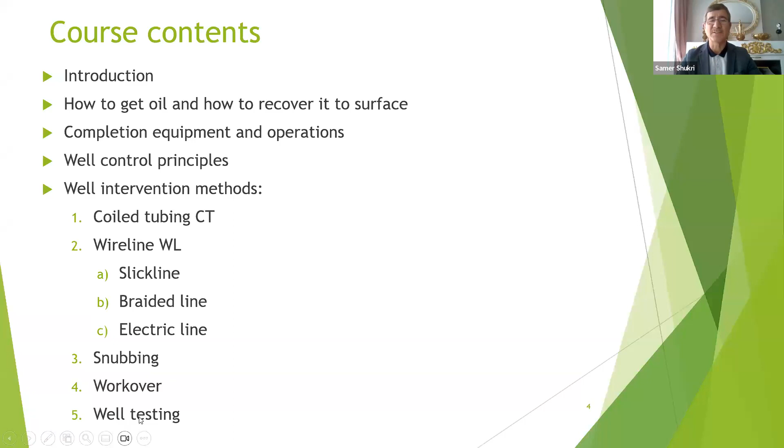Then well testing. Well testing is very, very important, so I will give you golden rules and golden principles for this subject. You will be very happy because I like and love well testing too much.

So I will spend maybe 2, 3, 4 days as you like and give you all the secrets of well testing. For coil tubing, we will go through these items: what is coil tubing, the birth of coil tubing technology, advantages of coil tubing, because sometimes you cannot use wireline if the well is deviated, highly deviated, or horizontal.

So you have to use coil tubing if you want to pump fluids. Barrier theory of coil tubing: we have primary, secondary, tertiary barriers. Calculations, we have too many calculations. Pressure testing, how to do it. Emergency procedures, about 10 procedures we have. BHA components, bottom hole assembly.

We have maintenance, coil tubing manufacturing and material, coil tubing onshore and coil tubing offshore - there is a difference between them. The space is very limited offshore, so we don't have truck mounted or trailer mounted there. Onshore we have trailer mounted.

But offshore we have truck mounted, lifted onto the rig or platform. You see, trailer onshore, truck offshore, by lifting. They give you a space of 2 by 2 meters, you cannot take more, or maybe 5 by 2 for example. So you have to know where to put your equipment. It is not open like the desert where you can put it wherever you want - that is not allowed.

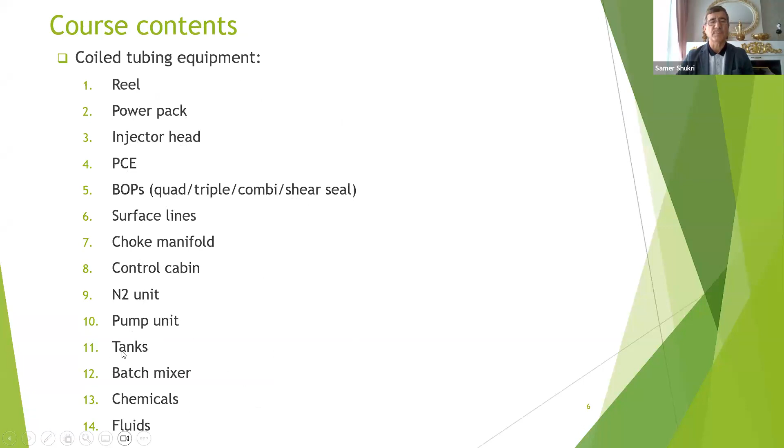The equipment of the coil tubing includes the reel, power pack, injector head, pressure control equipment, and BOPs. We have four types: surface lines, choke manifold, control cabin, nitrogen unit, pump unit, tanks, batch mixer, chemicals, fluids. Now, what are the applications of the coil tubing?

We have unlimited applications of coil tubing. It is the best invention in the oil industry, the best invention ever. Why? Because we save time and cost compared to working with a workover or drilling rig. If you want, you can do this job or operation within one day, and it can cost you 10% or 5% of the drilling cost. You will be very lucky.

And that's what happens. We'll go through nitrogen lifting, acid stimulation, and acid frac. I saw many frac people here in this course, so we will focus on the frac also.

We have two types of frac, we'll go through them. Sand clean out also, and the possibility of getting stuck. We have perforation, three types of perforation, we'll go through them: open and closed SSD, milling, and fishing. I will give you a study case also for fishing, milling, and videos.

I think three weeks is very little time. So I don't know what to do, but we will do our best. Displacement of fluids, drilling also using coil tubing, acid wash, scale clean out, logging, circulation, and production.

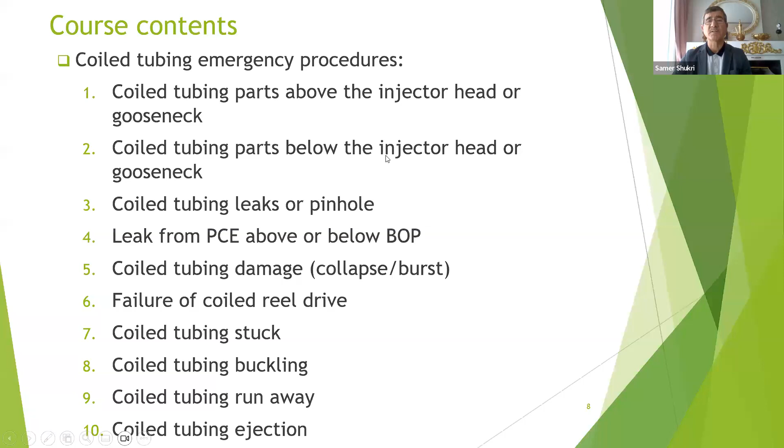Here with coil tubing, we will also take emergency procedures for all of these cases. For example, coil tubing parts above the injector head or gooseneck, coil tubing parts below the injector head or gooseneck, and so on. We will go through them one by one, and what to do in case you have this situation.

Study cases, all of these happened with me personally, and I like to transfer what I have had in the past to you, to add to your knowledge. For example, while we were working with coil tubing, it got stuck during a cleaning out operation. This happened with me, and I will tell you what we should do in this case.

A leak in the coil tubing at surface, coil tubing cut by itself downhole, coil tubing got stuck in the open hole, leaking of a stripper during nitrogen lifting, pinhole in coil tubing between gooseneck and reel, fishing of a stuck wireline plug using coil tubing.

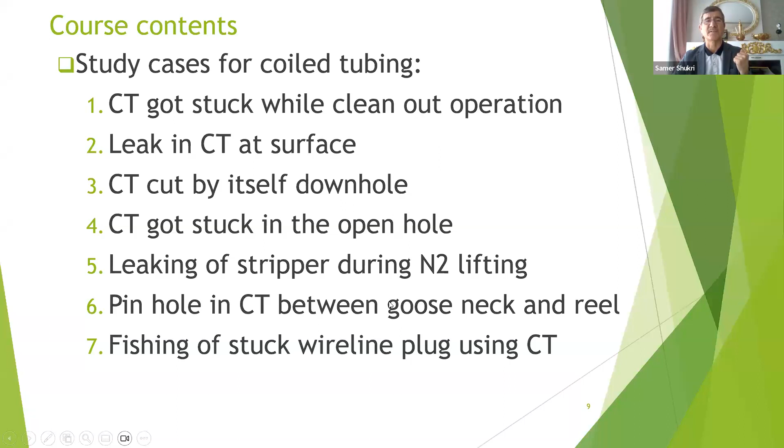Here I did this fishing job, and we were rewarded because there was a big problem and the well was closed for two weeks. When we retrieved the stuck wireline plug with coil tubing, we were rewarded, and a thanks letter was given to us, me and my crew.

Let us move now to slick line operation. I told you wireline includes three types: slick line, braided line, and electric line. This is a slick line. What is a slick line? The birth of slick line technology.

Advantages. We have barrier theory: primary, secondary, and tertiary barriers. We have slick line sizes, the main sizes are 0.108 and 0.125. There is less and there is more.

Pressure testing of the equipment. Emergency procedures, BHA components, maintenance, and inventory. Here we have inventory also. Slick line manufacturing and material.

Slick line onshore and slick line offshore. Here I told you it is trailer mounted, here truck mounted. So by lifting here, like a box, and you put it, same as coil tubing.

Slick line crew members. Normally we have three guys: supervisor, wireline operator, a crane operator, and helper or assistant. So three to four. When it is a big size, you should have four, but when it is small, you should have three.

Slick line unit diagram also. Slick line unit reel. Here, slick line, we have these pieces or components of the slick line equipment.

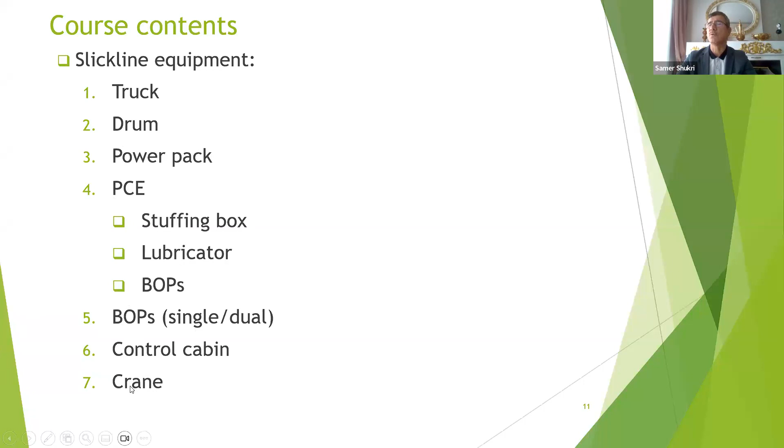Slick line has too many applications. For example, before we send any coil tubing to the well site, or we want to check accessibility, we run a drift gauge cutter. We run it to check accessibility, whether you have scale, sand, or any obstruction. You will discover it and avoid further problems.

Set and pull subsurface safety valves, open and close SSD, set and retrieve gas lift valves, scale removal, tubing punch.

You see, for each one of these tools, I will show you the tool and its principle, how it works, and if you have any problem, how to avoid it. So you will feel as if you are working personally, and this will give you a background. But once you do one or two operations, you will seem as expert as someone with 30 years of experience. So don't worry about it. It's very easy. You see too many things, but with time, after two operations over a month, you will become expert because you have good knowledge and experience from these courses.

Courses such as this are cumulative. What do I mean by cumulative? Course above course above course, you will go up. While if you just sit watching TV or listening without effort, there's no benefit. So you have to put more effort on yourself to improve.

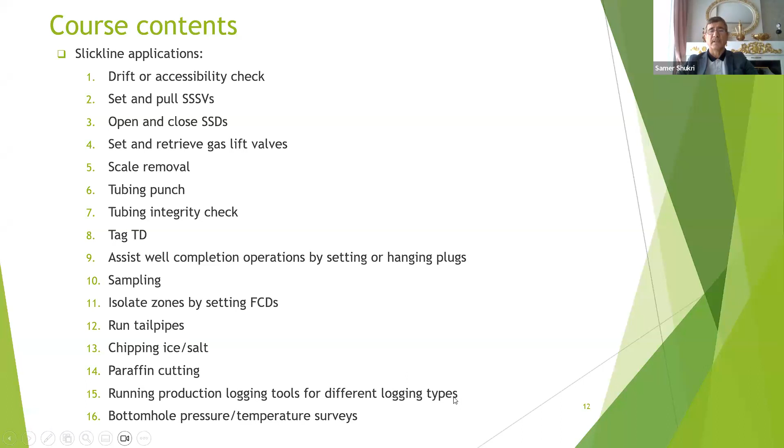Sampling also - I saw a sampler here in the course, just now. We will talk about sampling. Isolate zones by setting flow control devices, run tailpipes also, chipping ice or salt which is an obstruction, paraffin cutting using a gauge cutter, running production logging tools for different logging types, bottom hole pressure and temperature surveys.

This is very important. This is very, very important. Number 16.

Now, the emergency response procedures for slick line will take these also, all nine of them. I gathered them and I will transfer the knowledge to you.

Stuck slick line - what shall you do? Part slick line - repeated jarring up and down for a long time. We have also how to cut slick line in an emergency. We have a procedure, special procedures, five steps.

So if you don't know, if you only know three of the five steps, it is not a complete answer. So you have the whole procedure as five steps.

Slick line got out of the well, slick line got out of the wireline tool string. Sometimes the slick line gets out of the rope socket. The rope socket is the connection between the tool string and the wireline that is available on the drum. So it can get out.

What shall you do about a leak from the pressure control equipment above the BOP? This is very dangerous, especially if you have H2S, hydrogen sulfide, or high pressure, or gas, or a leak from below the BOP. This also has its own procedure.

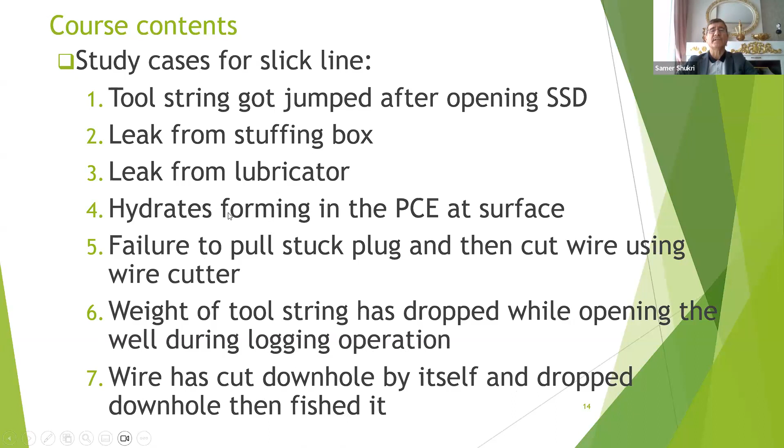Let's move on to braided line. What is braided line? Its origin, its advantages - we'll go through them one by one. The barrier theory of braided line, and its sizes.

What else? Pressure testing. We also have emergency procedures, BHA components - bottom hole assembly - maintenance, manufacture and material, onshore and offshore, crew members, wireline unit diagram, and wireline unit rig up.

Here also the applications: how, when, where is it. Electric line information also, this one we reach to here. What is electric line information? So I told you we have 3 types of wire line: slick line, braided line, and electric line.

This is braided line. Inside it, we only have metal. There is no conductor in the middle, so there is no electrical signal transfer from surface to bottom and from bottom to surface. This only applies more tension. If you get stuck with slick line, then you can use braided line.

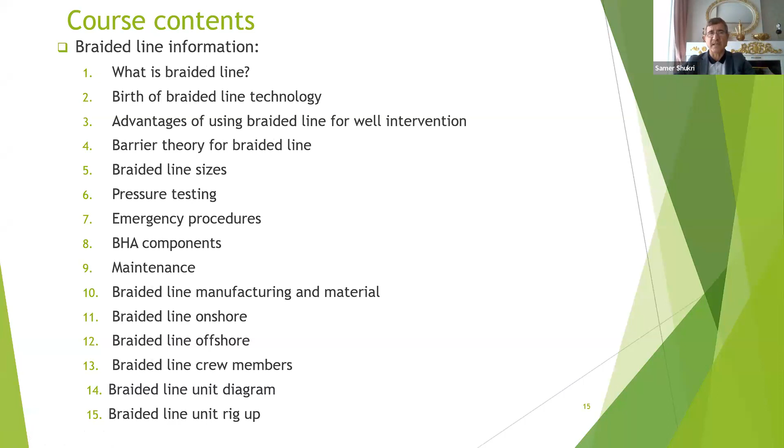But for electric line, we have to run in the hole and obtain the surface readout. What does surface readout mean? SRO, we call it. Mr. Fidel, you can write down your question, and at the end of the session I will answer you. Don't worry about it, this is for everybody.

Electric line, what is it? We'll go through it. It is wire line. Look at this one, similar to braided line, but in the middle you see we have a conductor, a brass line. This conductor can send electrical signal from surface to bottom and vice versa.

And we can get surface readout. For example, if the pressure and temperature are X and Y at the formation at the depth of 10,000 feet, then we can read it. If the flow from this zone is 1,000 barrel, we can see that the well is producing from this zone 1,000 barrel of water, gas, oil, whatever, we can see it. So we can use this one. We call it electric line.

So what is the birth of it? Advantages, barrier theory of electric line, sizes. We have 2 main sizes: 7/32 and 5/16, so 2 sizes, same as braided line. Pressure testing, also emergency procedures, BHA components, maintenance, manufacturing and material, onshore, offshore, crew members, diagram and rig up.

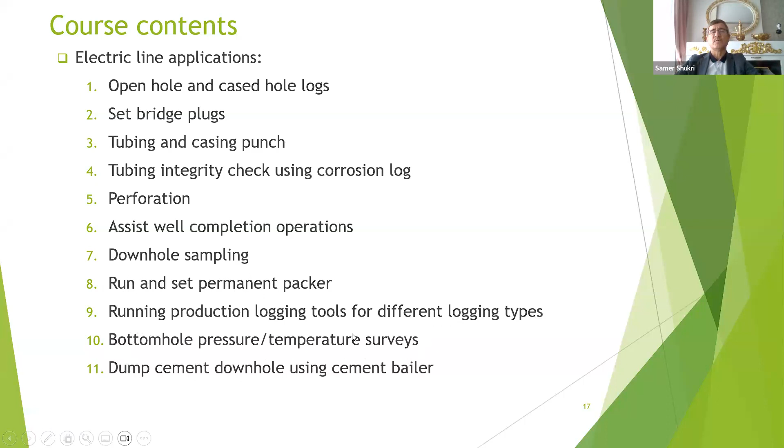Assist well completion operations, downhole sampling, run and set permanent packer, running production logging tools for different logging types, bottom hole pressure and temperature surveys. This is very important. Dump cement downhole using cement bailer. Also, we send electrical signal to the cement bailer, then we can open it and dump the cement.

Study cases, we have 5 study cases for the electric line: blowout of tool string after perforating, tool string got stuck in the open hole, bird's nest of electric line in the grease injection head, leak in the grease injection head, and tool string got stuck in the tubing and cut wire from the weak point.

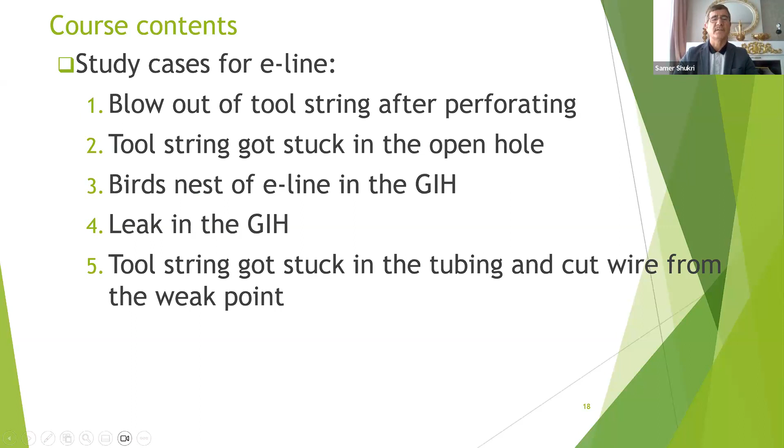So this is very important. How do you calculate weak point?

Also, let us move to hydraulic workover or snubbing. As per my knowledge, it is rarely used, but I am accredited from IWCF to deliver this course as part of IWCF, so we deliver 3: wireline, coiled tubing, and snubbing. This is very important, and I will make you expert during the course.

How do you deal with it? How can you take the certificate and be certified with hydraulic workover? I know that in Algeria they use hydraulic workover. It is very easy. I will show you the principle and explain to you. Maybe we spend 2 or 3 days on it. So this subject is very interesting and I like it.

So what is snubbing, hydraulic workover? Birth of snubbing technology, advantages. So you don't need to move a rig here for workover, you are working on hydraulic workover. You will see hydraulic workover means that you don't need to kill the well. If you need workover normally, you want to kill the well.

But here, hydraulic workover, what does it mean? It means that you are working under pressure, so you have pressure from A to Z during the whole operation. So how can you deal with it? How can you deal with the pressure coming from inside of the completion and from outside of the completion? All of them, we will go to them.

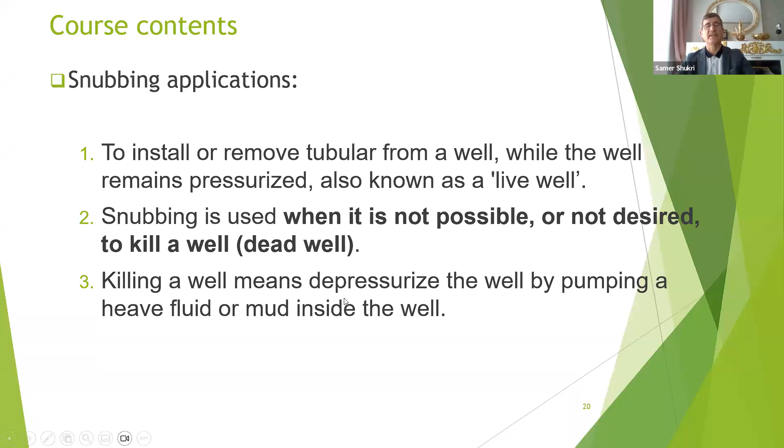Workover. Here, workover is very important also. I saw many workover supervisors. You are working, we'll go through them.

Normally, I deliver a 1 week workover course. This is an important course, 5 days. But for you, I will do my best to spend 3 days, just to balance between other subjects.

What is the birth of workover technology, advantages, barrier theory for workover, pressure testing, emergency procedures, maintenance, manufacturer, onshore, offshore, and diagram. I will show you the types of workover rigs available in the world, and we can utilize them.

Workover applications, what are they? We will take these 10 applications. The first one is change out completion string. This is the most famous one.

Deepening the well, digging the well deeper, maybe 50 meters, 100 meters. This can be done using workover.

Carry out acid stimulation using tubing string, casing repair by pumping cement, then pressure test and check if the damaged casing is repaired or not. Pull and replace casing, isolate depleted zone using cement, set liner, zone change, fishing operation for different components in the well, and kill operation.

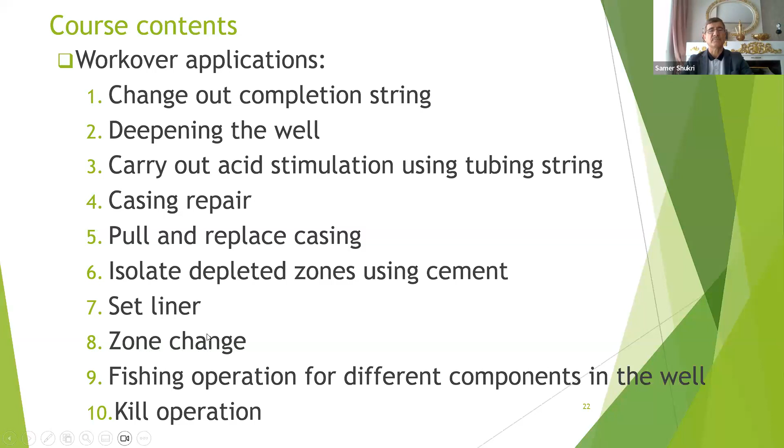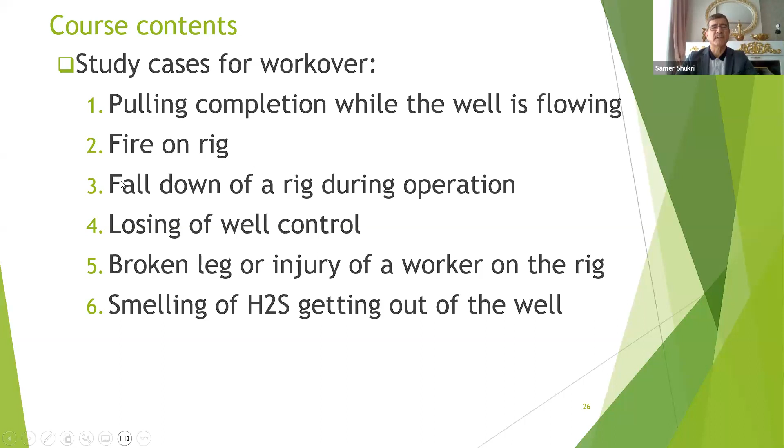Let us move to HSE, Health, Safety, and Environment information. We can talk about OSHA - this is the American certificate for safety. IOSH, this is British from UK. NEBOSH, also British. Incident investigation - I will tell you about techniques.

How can we do incident investigation, managing safely, main HSE principles and procedures, how to prevent incidents by being proactive, not reactive. Before the incident occurs, you would put all your controls to avoid or prevent this incident from occurring. So you have always to be proactive.

Every one of us should have safety like this, not like this. You don't tell me that you are a drilling engineer, finish, you are safety also. You should have safety at least 70%, 90%, or 100%. Without safety you cannot work. So we can focus on safety.

Many incidents occurred due to the ignorance of safety by personnel. Why? It is very easy. Within this course you will be expert in safety. Safety is the work of everybody - put it between brackets - safety is the work of everybody. So you have to learn and improve your knowledge, improve your experience.

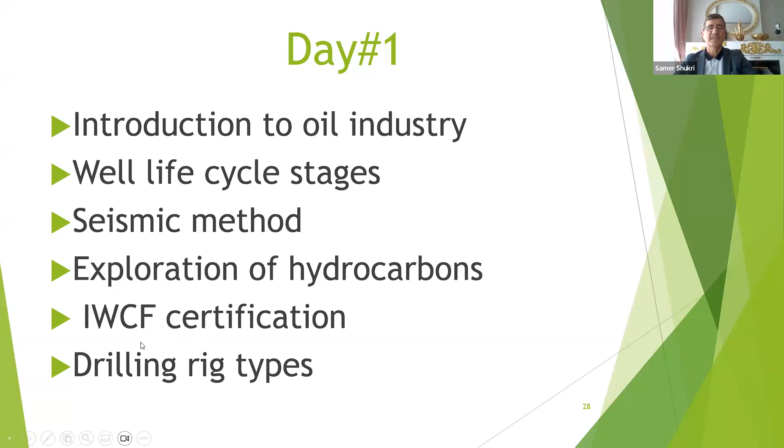Introduction to oil industry: when you say oil, it means gas inclusively, oil and gas, or we say oil industry or oil and gas. Well life cycle stages, seismic method, exploration of hydrocarbons, IWCF certification, drilling rig types.

We can look at it very fast - how oil was formed over the last hundreds of millions of years. We will take an idea about it, and how can we discover it using the seismic method by sending sonic waves, which reflect from the surfaces of the rocks that contain these hydrocarbons, and then we can move the drilling rig and drill a well.

This well either has oil and gas or is dry. If it is dry, then you do your best. If it is having oil and gas, then you can drill another one - second, third, fourth, and so on.

So we have many types of wells. The first one we call exploratory well, which we select based on seismic data or survey. When we find hydrocarbons, then we go to a development well - that is drilled afterward, at the exploratory discovery site. After we discover the hydrocarbons, we can select other locations close to this well or away from it. It depends, and we can depend on the seismic data.

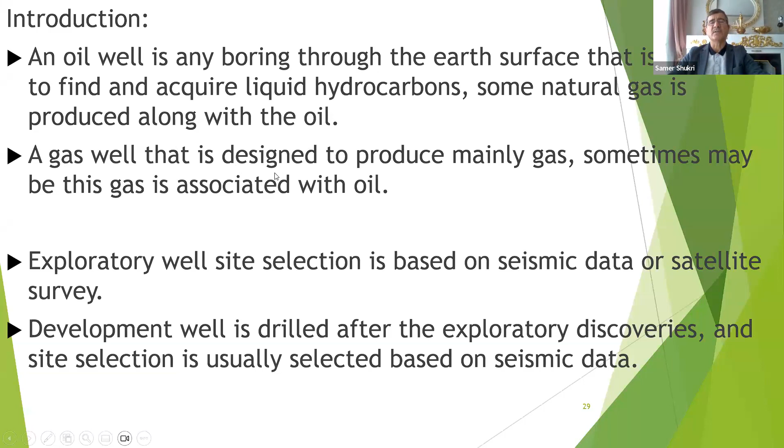Sometimes this gas is associated with oil, so gas and oil together. For your information, oil cannot be present alone without gas - that is seldom, rarely. But gas is always associated with oil. So this gas percentage is either high or low, depending on the reservoir and the hydrocarbons available in this reservoir.

Now we move to the well life cycle. Either we can take this one or take this one. You see drilling from the beginning - drilling, then completion. Drilling includes drilling and running casing, then running the completion or tubing with packer, with packer completion accessories. Then production - do perforation, stimulation, and lift the well. This is intervention or maintenance using wireline, coil tubing, slick line intervention, well testing, all of them. Then at the end, plug and abandonment.

This plug and abandonment - every one of us has a limited life, either 50, 60, 70 years, but cannot live for 1,000 or 2,000 years, right? The well is like this also. It can die, and we close it using a plug and abandonment with 3 plugs of cement. And we isolate the well and remove the Christmas tree and keep it alone, as if somebody died - they put like a stone, and we put a small piece of metal saying here there was this well.

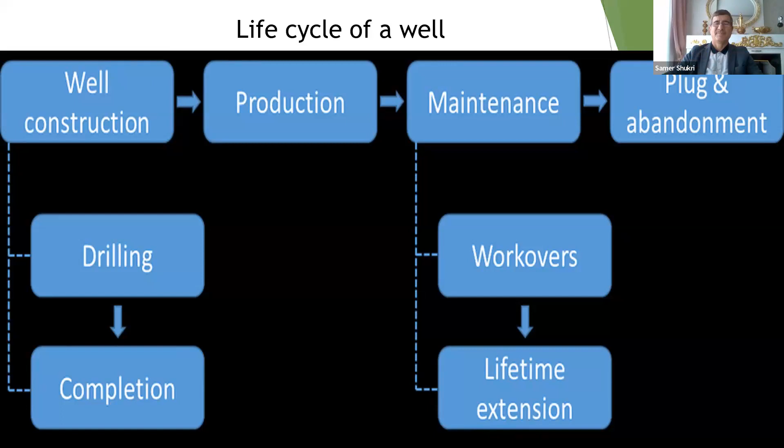What shall we do? May Allah have mercy on it - bye-bye for this well, we do plug and abandonment. It died. Very nice - you see the period: the drilling may take not 2 weeks, maybe 2 months or 3 months, like this, for drilling.

Then production and completion, you see. Then maintenance or production for 20 to 30 years. So this is included under the umbrella of well intervention. The drilling can work for, say, 1 or 2 years, but you are working for 30 or 50 years. So this is a very important stage in the well life cycle.

We deliver such long courses to make you expert, so you know what to do in case the well becomes old - same as you will become old someday. All of us are young now, but after 20, 30, or 50 years, we'll be like this well. We need to measure our blood pressure, sugar, X-ray, and so on. Why? Because if you have any problem, you can take action, take medicine, or do whatever, to extend your life.

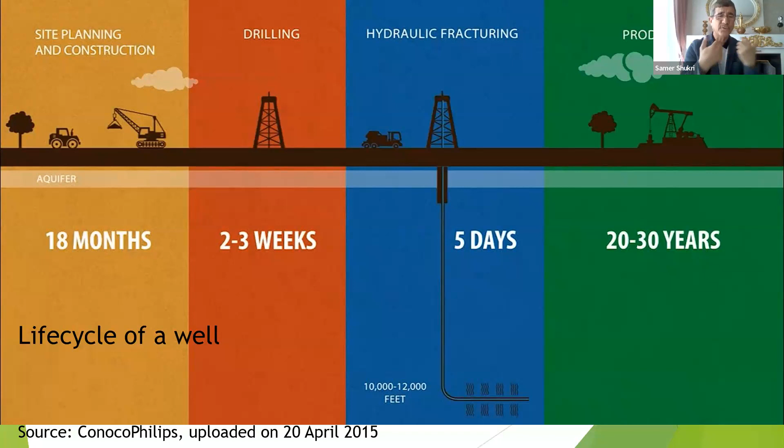You go to the doctor, he tells you that you have this problem, you have to take this medicine or do this operation. Same with a well - when we look at the log, we conclude the well has this problem, so we have to close this zone and open this zone. The tubing is parted, we have high water cut, high GOR, the reservoir is depleted, and so on. So we are doctors in oil and gas wells, but the doctor is for us, human beings. That's the difference, but the same principle.

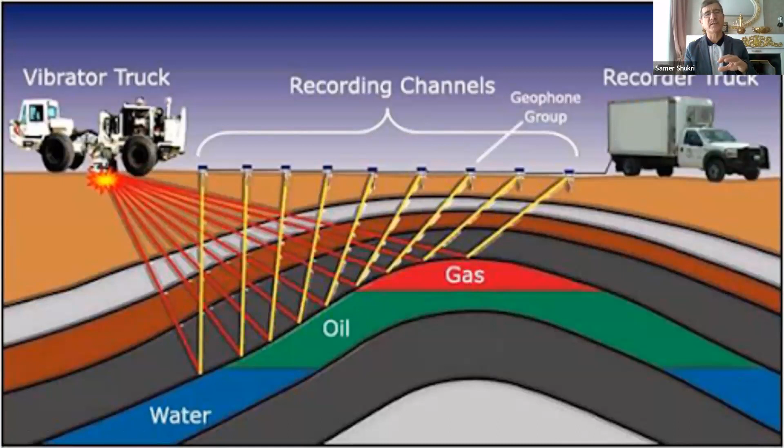Then if we find oil and gas, we can drill development wells - we talked about this. All of this data goes to the recorder truck, which collects it. We do data treatment or interpretation, which gives us seismic maps. It will tell us here there is possibility to find oil or gas, and here there is no possibility, and so on.

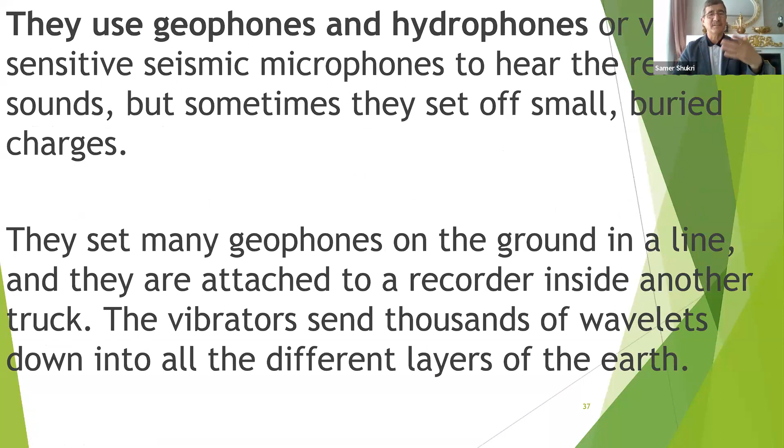Here we are talking about geoseismic - we have seismic engineers also. I didn't work in this; I studied it in university and later watched videos and studied more, but I never worked in it directly. But we can imagine it. You cannot work in everything in your life, just most of it.

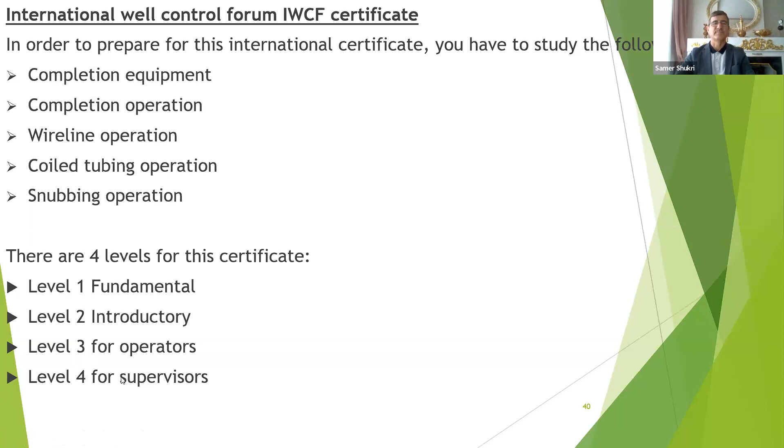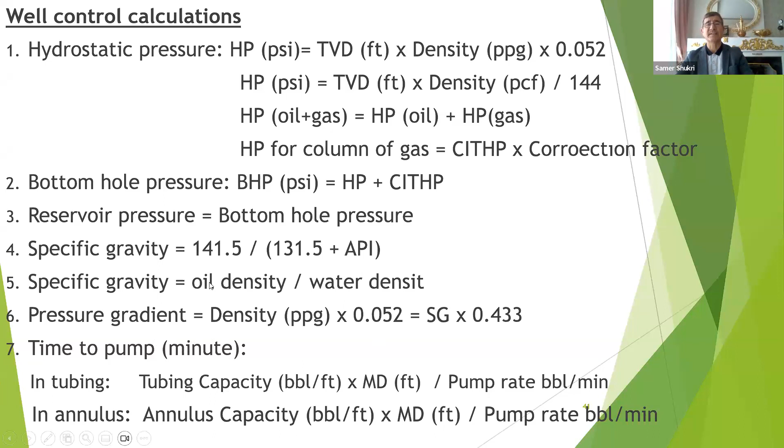Here are some calculations. I will teach you about the calculations, the formulas that we use, and give you examples so you can see yourself going faster and faster once you know the principle. If you take a photo of this, I collected 7 formulas. I can also give you the IWCF formula sheet for both drilling and well intervention, plus the kill sheet and all of them, just to improve your knowledge, and you will see yourself at a higher level over time.

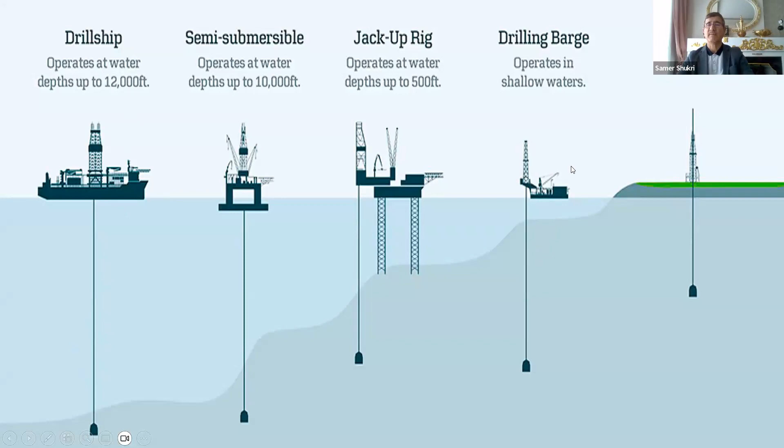You see, this is land rig, this is onshore, and the rest are offshore: this is jackup, this is barge, this is semi-submersible, platform, and this is drill ship. You see this Turkish platform, Turkish drill ship.

We call it Yavuz. Yavuz and Fatih, and there is a new one, the third one. So it is very interesting, very interesting.

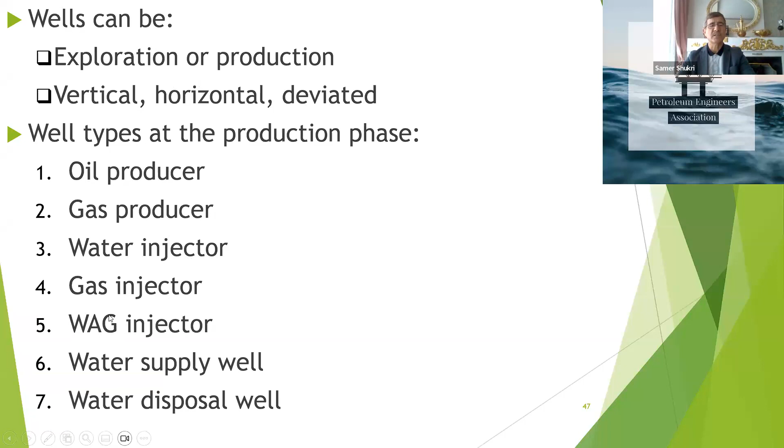Now let us move on to well types. We mentioned exploration and production, and vertical, horizontal, and deviated. Well types also include oil producer, gas producer, water injector, gas injector, and WAG - water alternating gas - which is an injector well. For 6 months you inject water, and then 6 months you inject gas. There is also water supply well and water disposal well.

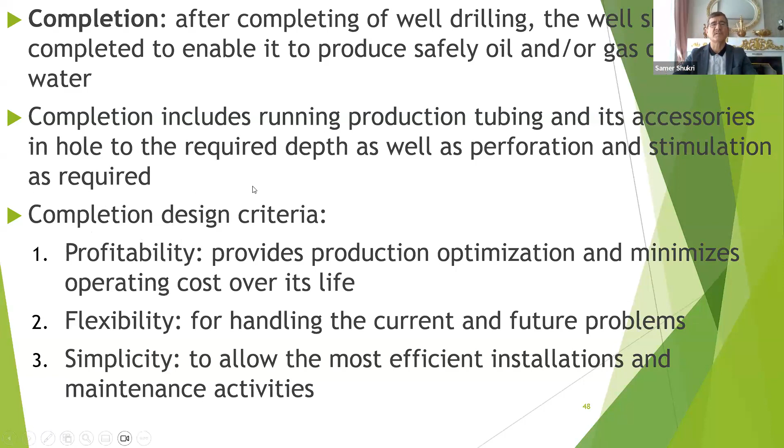Here is the completion: what is the profitability, what is the criteria of the completion design. Before 25 years, I attended a course called completion design, 5 days, on how to design the completion and what are its components. So I will spend a good amount of time with you on completion too, including the objectives of the completion. We will go through them one by one.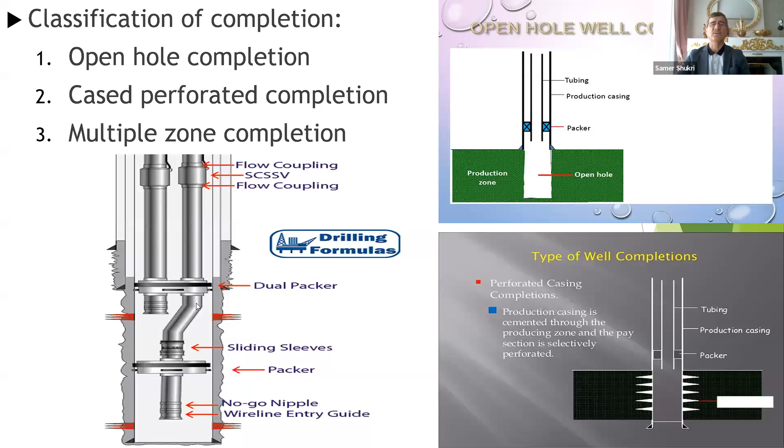So you produce 4,000 barrels per day of oil. From the short string - we call this the short string and this the long string - you can control it, and it's not very difficult. It is very easy; you just apply the company procedures, then you can work safely with no problems. You see single completion, single selective, dual completion, dual selective.

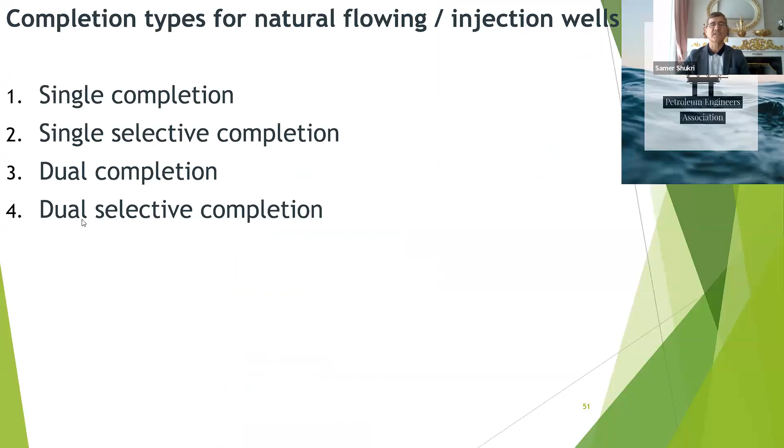We will see them. This is single vertical well. This is single selective: top zone, middle zone, bottom zone. So either you produce from 3 zones, or from 2, or from 1. Dual has short string and long string. What else? What is this one?

This is single slim hole. We don't run completion accessories because the reservoir pressure is very low, and in this case we prevent or avoid any obstruction in front of the formation that would prevent it from flowing freely. What else? We have vertical completion here - you see this is the packer, this is the completion, this is the SSD (sliding side door), top packer, middle packer, bottom packer.

We have perforation. While here we have open hole, we have a horizontal well. This is vertical well, this is horizontal well.

Also, what do we have here? Side pocket mandrel, you see it. This is a gas lift well, you see, not gas injection.

We produce the well using gas lifting from here. I will explain to you the principle of gas lifting using the side pocket mandrel.

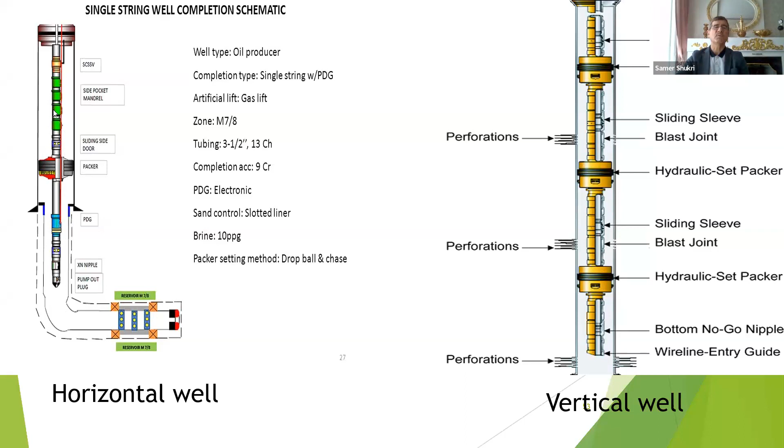This is a type of artificial lift. You see, the artificial lift, we have 4 types.

Gas lift, which we mentioned, and gas lift mandrel. We mentioned that, you see it. Look here: gas lift valve, gas lift valve. For example, 500 feet, 1,000 feet, 1,500 feet, and so on.

So when we pump gas from here, it will produce like this. When we pump gas and produce gas, this valve will close and go to the bottom one, and so on.

Till we produce pumping gas and producing gas. At this stage, what shall we do? We have to stop, and allow the well to build up. We stop, for example, pump for 1 day and stop for 1 day to allow the well to build up.

Build up means this oil available in the reservoir goes up, for example, to 500 feet or 1,000 feet.

Then using pumping gas, by gas injection, it will help us get this oil to surface.

Okay, the other type is ESP. This is ESP, you see it, by pumping the pump.

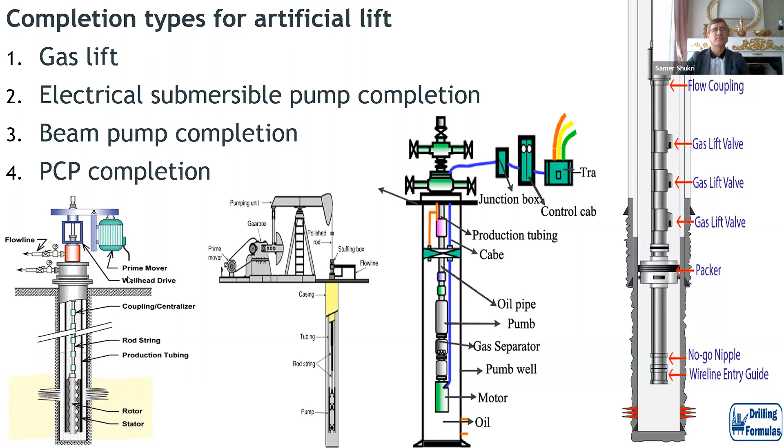Sometimes this gets cut. So we move the workover rig, fish it, replace it, and pull it. The motor also can be damaged, the prime mover, and we have here the wellhead and the clamp here.

The completion also, we can see the completion.

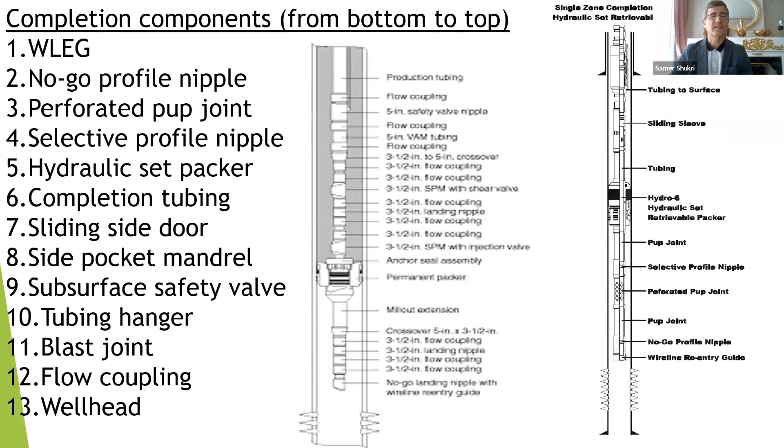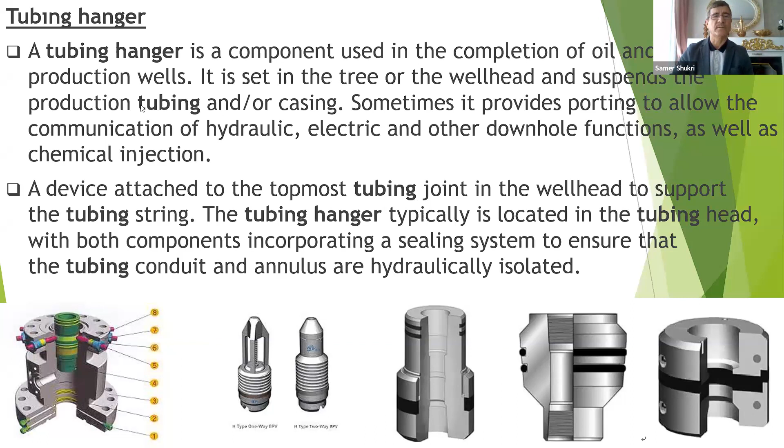You see, this is the back pressure valve, two-way check valve. You see the tubing hanger, and this is a cross section of the tubing hanger. We will go through them one by one.

Subsurface safety valves also have types: surface controlled and subsurface controlled. We have tubing and control line, you see it here. We have the subsurface safety valve.

Either can be controlled from surface or using the control line. The control line is normally 1/4 inch stainless steel 316. If you write it down, please: this is the specification of the control line of the subsurface safety valve.

Stainless steel 316, 1/4 inch. It can transfer the hydraulic pressure, hydraulic oil from surface to the subsurface safety valve, either to open or close it.

You see, here we have either wireline retrievable or tubing retrievable. Tubing retrievable can be run with the workover rig, while wireline retrievable can be run with a wireline unit.

This is the most important safety device in the well that can close the well in case of an emergency - fire, explosion, earthquake, anything. It can close the well and safeguard it. This is the subsurface safety valve. I can show you videos of how it opens and closes. You see, this is the flapper - this is open, this is closed. And this is how we transfer hydraulic power or hydraulic fluid from surface to open this flapper.

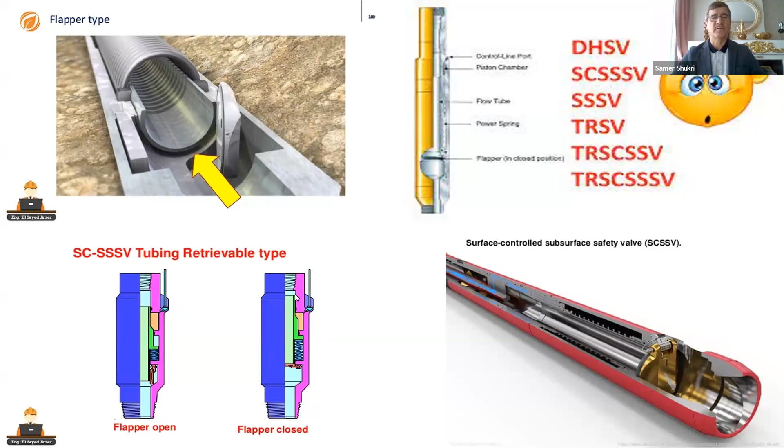Completion, corrosion, erosion - what is the difference between corrosion and erosion? I think corrosion is chemical, for example H2S with metal, while erosion is mechanical. Look at the water in the valleys when it rains - it sweeps the soil, you see the soil, it sweeps it. This is called erosion. And so on, we will talk about all of them.

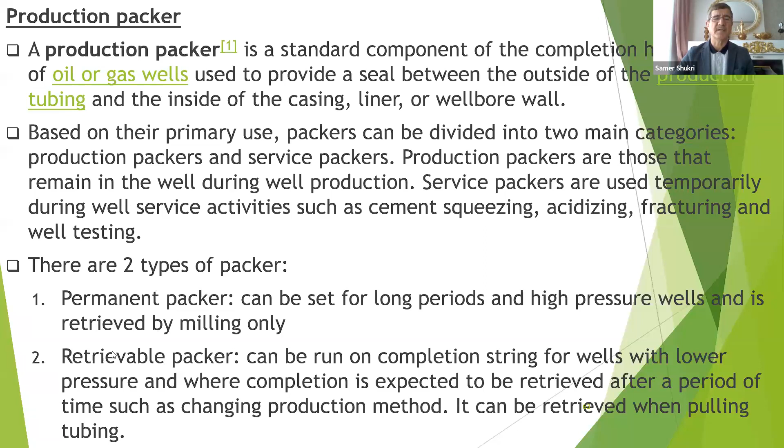The packer also - we have production packer, permanent packer, and retrievable packer. We can go through them also, you see, and single packer and dual packer here.

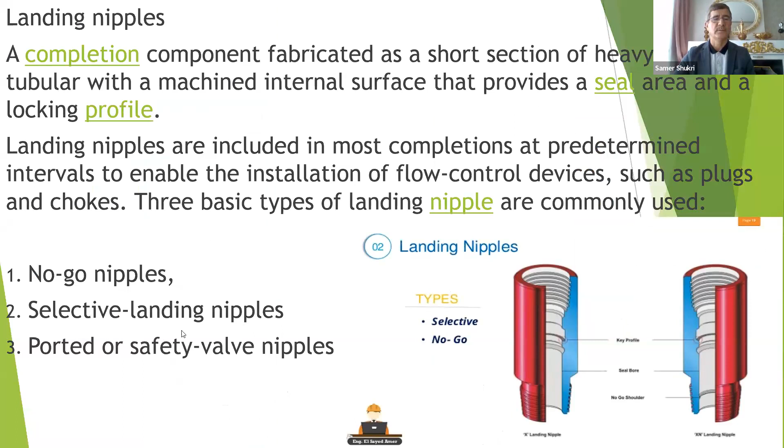Completion also, landing nipple - what are the types of landing nipple? Selective and no-go. You see, and ported safety valve nipple, landing nipple, selective nipple.

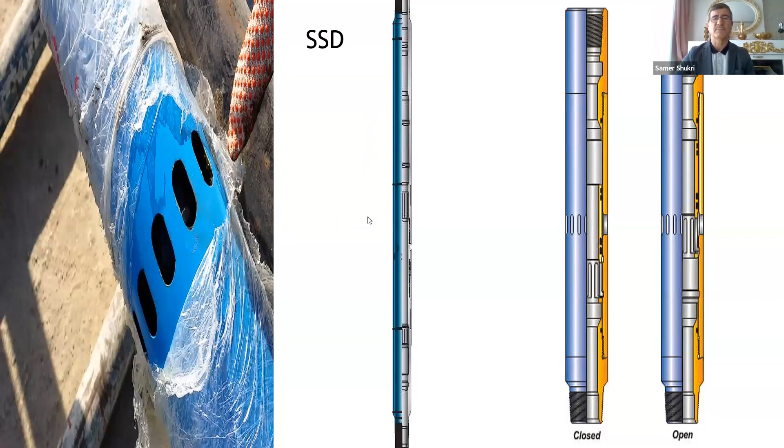Circulation devices, we have two types - side pocket mandrel and sliding side door. We will go through them. This is SSD, sliding side door. I will explain the principle of the side pocket mandrel and sliding side door. This is the side pocket mandrel, you see this one - kickover tool. We can run and pull what? Kickover tool for the gas lift valve.

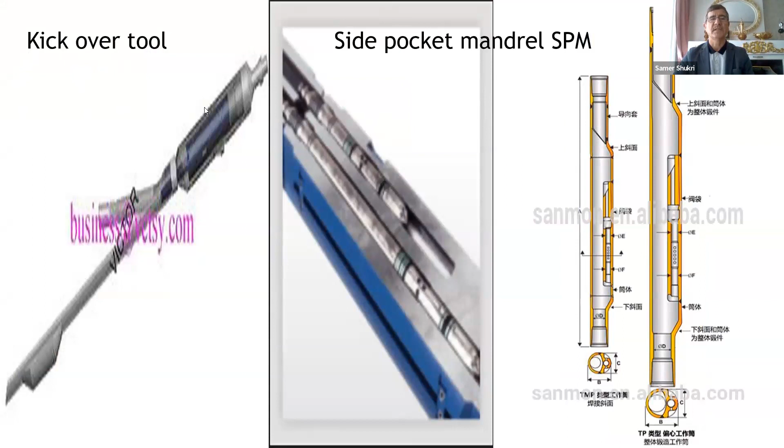We can use it using wire line, you see. Flow coupling - why shall we run it in the well also? Flow coupling, polished bore receptacle - PBR we call it - tool travel joint, you see. Wireline entry guide, the last piece in the completion.

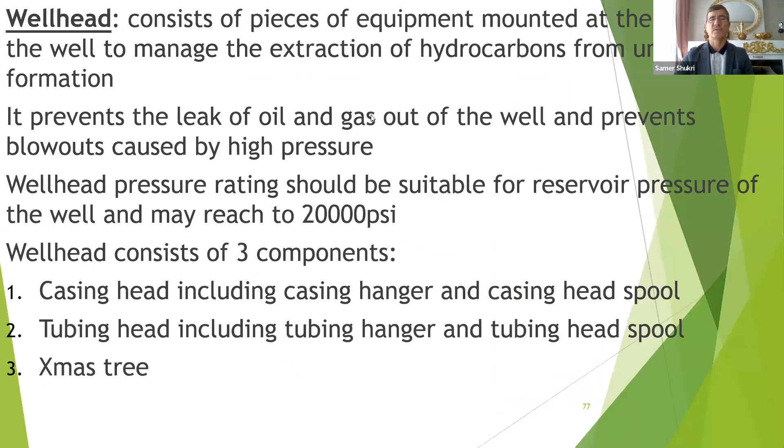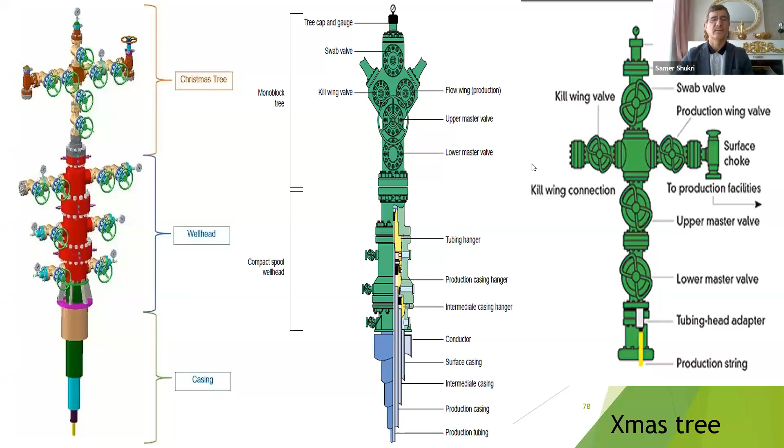Wellhead, you see the wellhead also here, the types of the wellhead. A Christmas tree, we have two main types - conventional and monoblock. So this is conventional, this one, and this is monoblock - one part, one piece. This is conventional, the green one. And we have compact or subsea. This is offshore, I will show you. You see, this is compact.

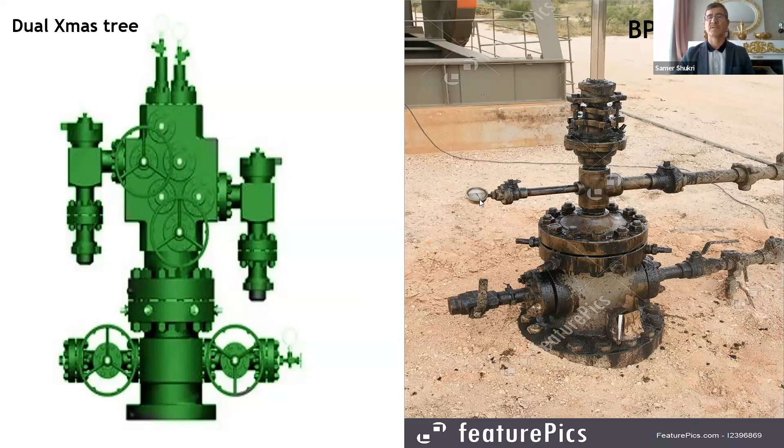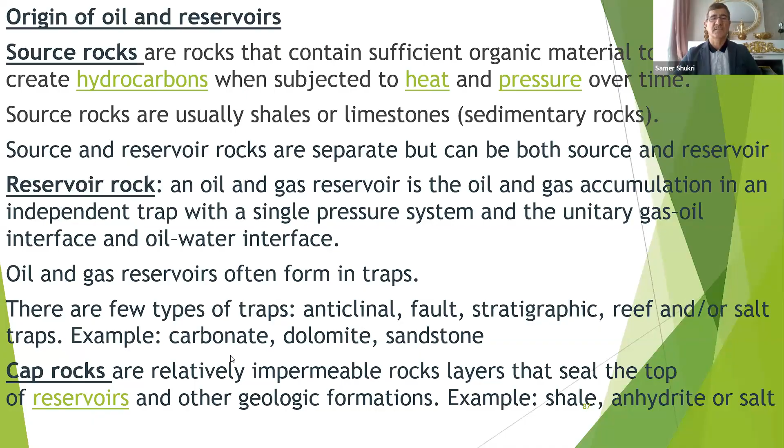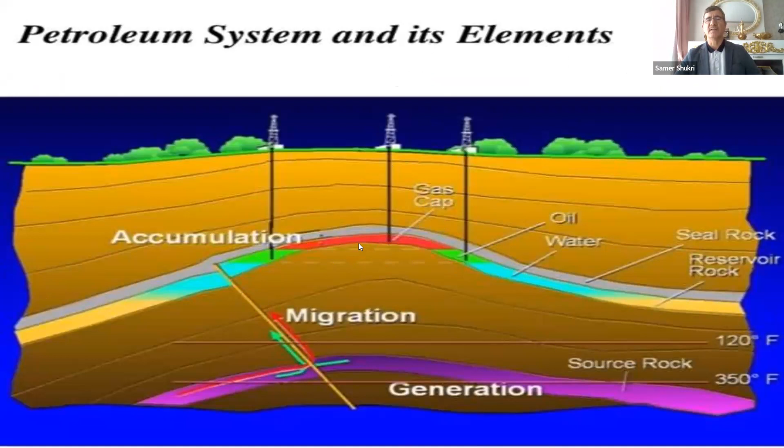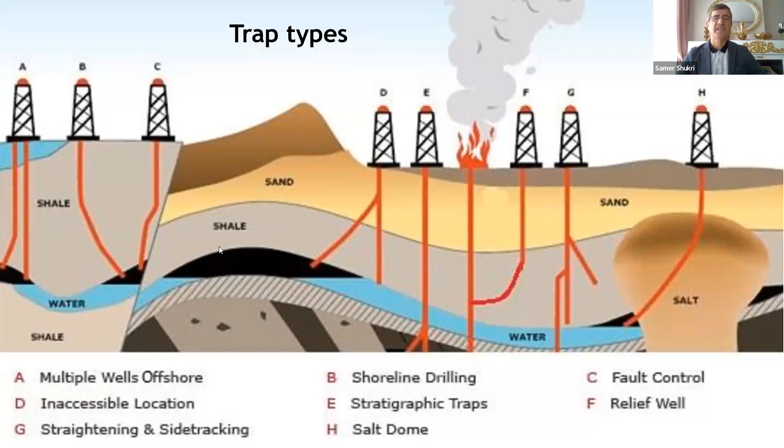The porosity and permeability also. What is the meaning of porosity? What is the meaning of permeability? Porosity is the percentage between the reservoir pores and the total volume of the reservoir. It may be 5%, 20%, and so on, but in general between 5 and 40%.

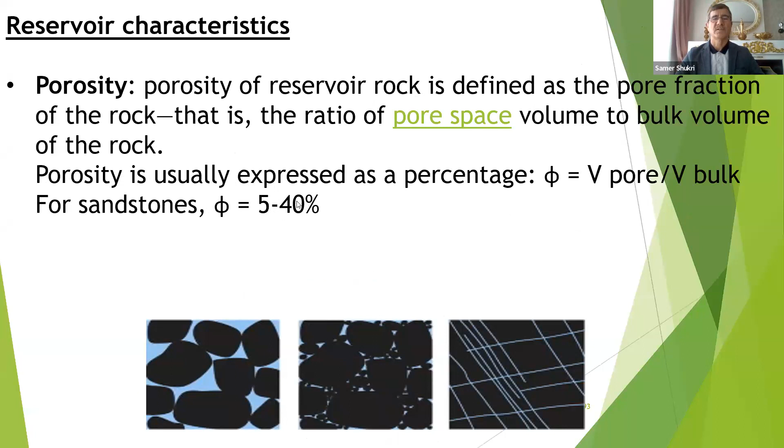The permeability definition is the ability of the reservoir to allow fluids to pass through it under a certain differential pressure. We measure it by millidarcy. Porosity (phi) means the pore space volume relative to the bulk volume of the rock, so it's a percentage, while permeability is measured in millidarcy.

Hydrocarbons also - what are they? They are carbon, carbon, carbon, hydrogen, hydrogen, hydrogen, and so on. Either it is light, natural gas, or condensate - this is also light - and petroleum is more heavy. We'll talk about bubble point.

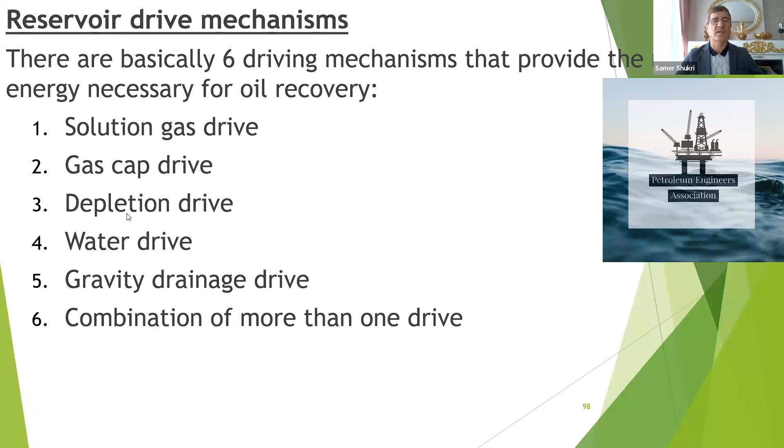Let us pass fast to the solution, the mechanisms of reservoir production. We have solution gas drive, gas cap drive, depletion drive, water drive, gravity drainage drive, and a combination of more than one of these drives.

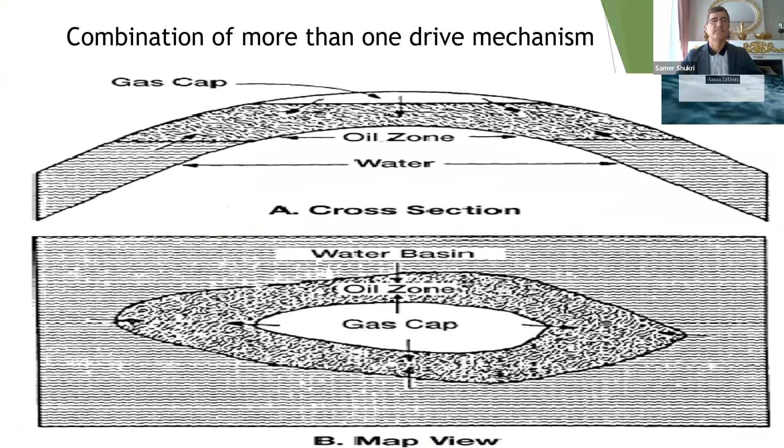Crude oil specifications - what are the specifications? We watch the news and they tell us West Texas Intermediate and what? Brent. So what are they? I will explain that to you.

The density - what is the density of crude oil? What is the specific gravity? Also here we can measure the specific gravity. We have API, American Petroleum Institute gravity. We will measure it here and see how much. As it is high, then it has more value, API.

The API of water is 10, but for brine or mud it is 6 or 7. For oil it is about 25 to 30, but for condensate it is 40 plus. Condensate is very, very expensive - we can sell it at high value.

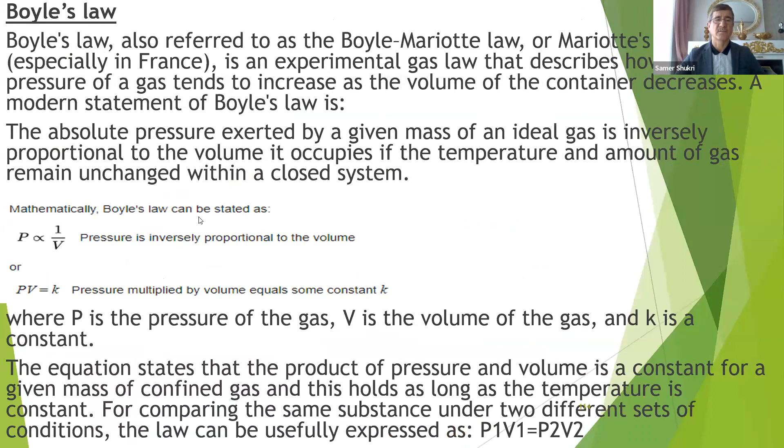Here, Boyle's law, P1V1 equals P2V2 for general gases. Pressure and volume are opposite to each other.

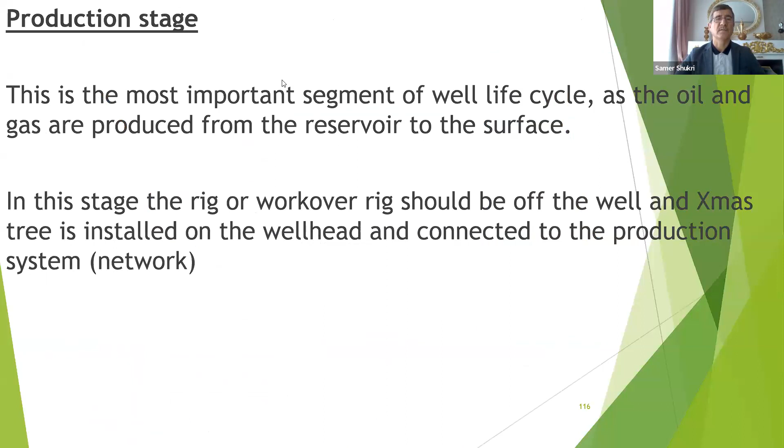Production stage also - I will just pass through it one by one. This is well testing. You see West Texas Intermediate and Brent, and there is Dubai crude also. You can go through them - if you press here, you will take all data from it.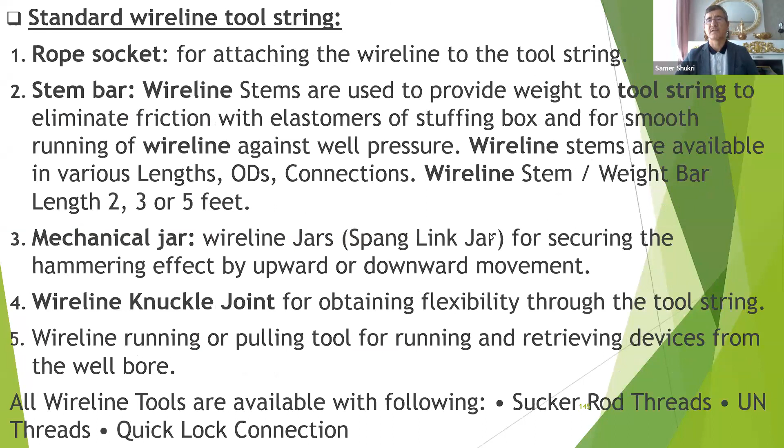Reservoir monitoring also - these are well testing here. This is wireline, standard wireline tools - wireline tools, braided line, perforation. This is braided line and electric line, coil tubing.

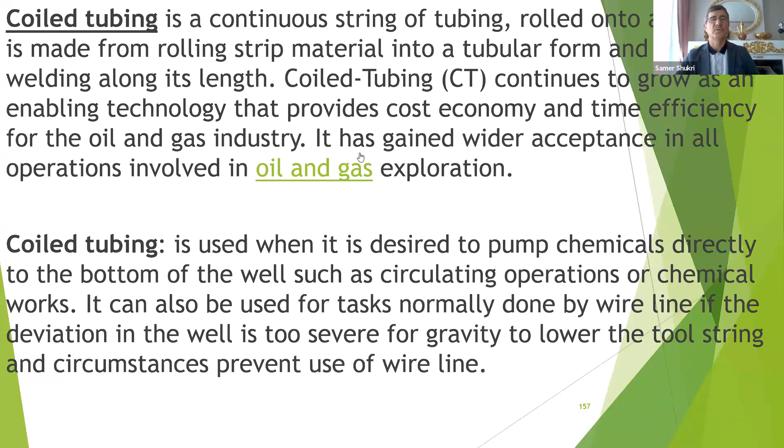We can go through it - cement, acidizing, frac, acidizing. You see, all of this only for this well. You see this well - frac. Imagine.

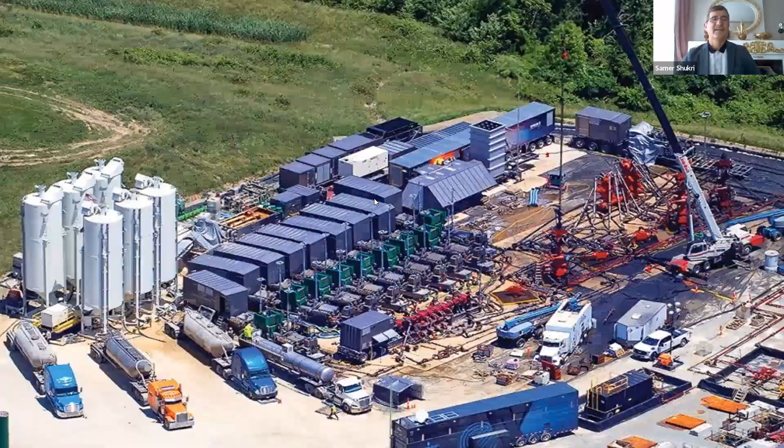Scale and sand, milling, fishing, pumping, wellhead, maintenance, workover. We go to workover - you see these workovers. Well kill methods - you see how to kill the well.

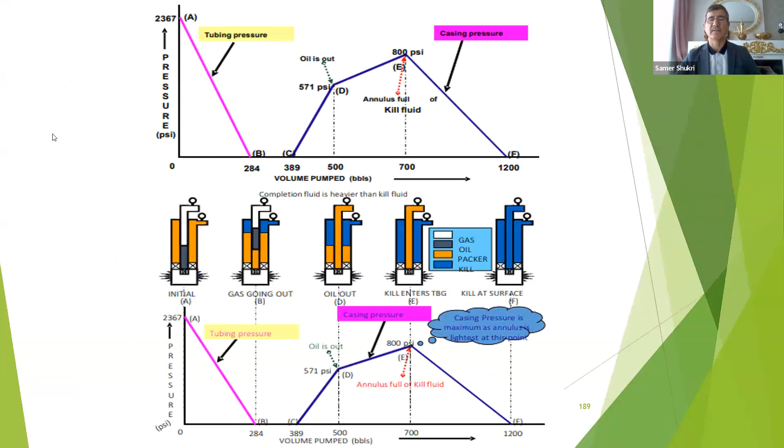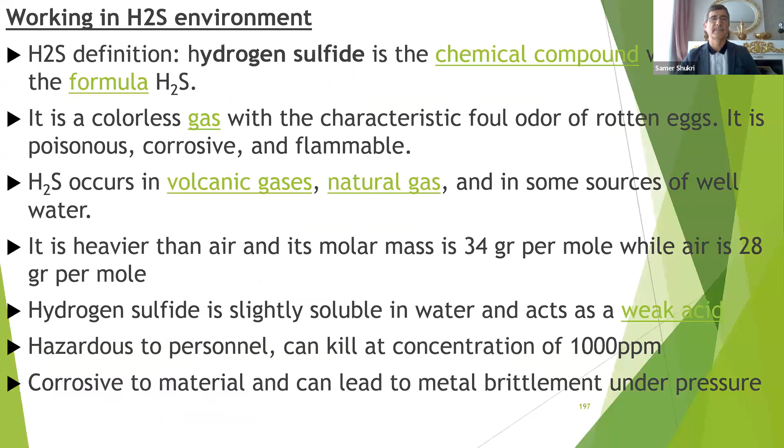Well logs, types of logs, noise log, working in H2S environment - what are the specifications of H2S, hydrogen sulfide norm?

This is radiation - what is hazard? Risk - what is risk? Controls also. Permit to work system.

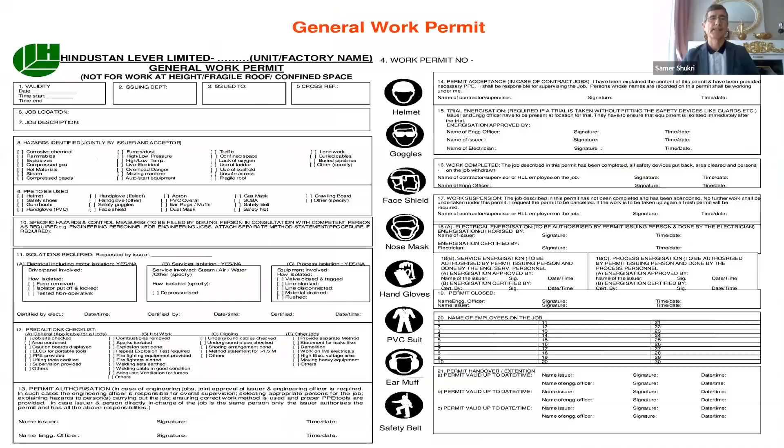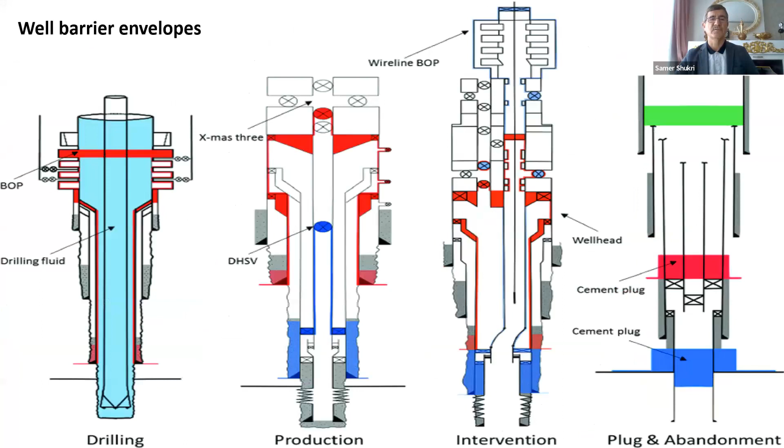Skin factor. Barrier theory - hydrostatic, mechanical barrier classification, you see all of them. Well integrity management system, WIMS, we call it WIMS.

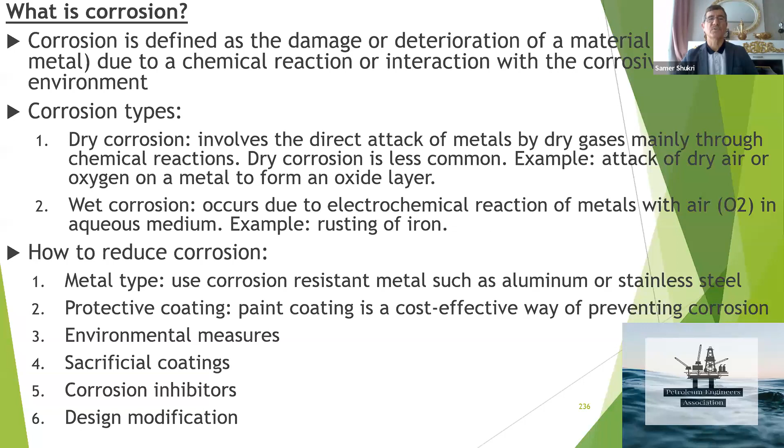Oil production. CO2 injection. What is corrosion? Cathodic protection, HSE incident prevention.

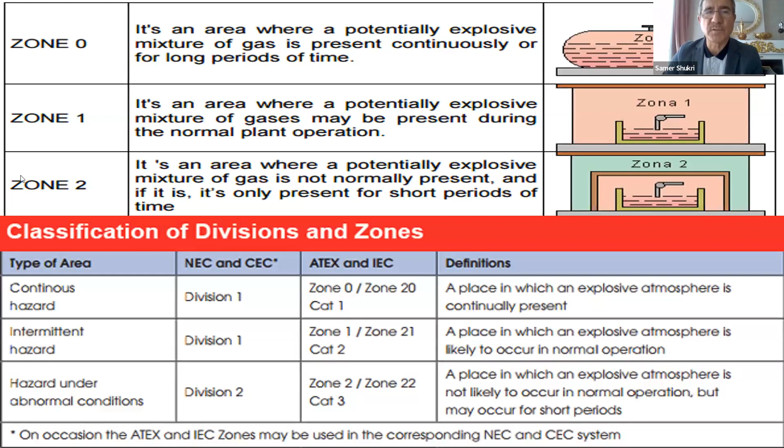Now here, the zone classification, hazard zone classification, unsafe act, unsafe condition, near miss, personnel protection - PPE, personnel protection equipment, you see.

Golden rules here for safety, incident prevention, incident management.

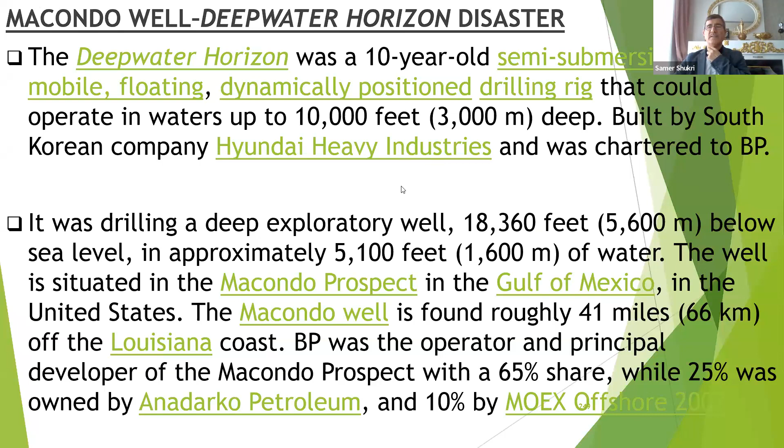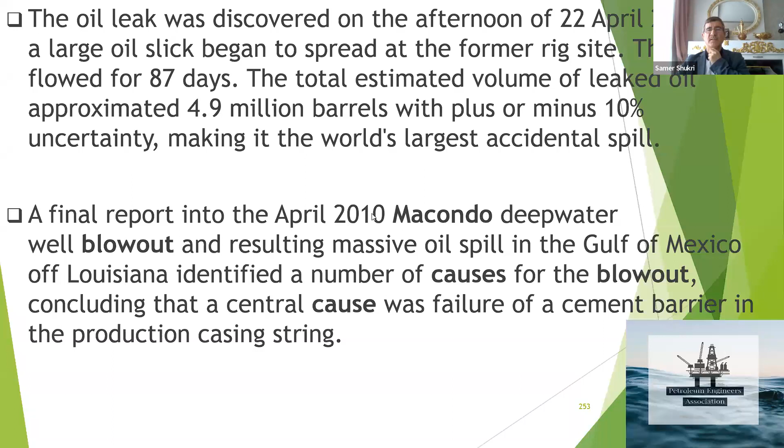After 87 days of blowing - you see, the blowout in 2010. They drilled two wells, relief wells, and then they controlled it.

H2S, you see. This I worked in these fields in UAE, in Abu Dhabi. So it is interesting - I can share some of my knowledge with you.